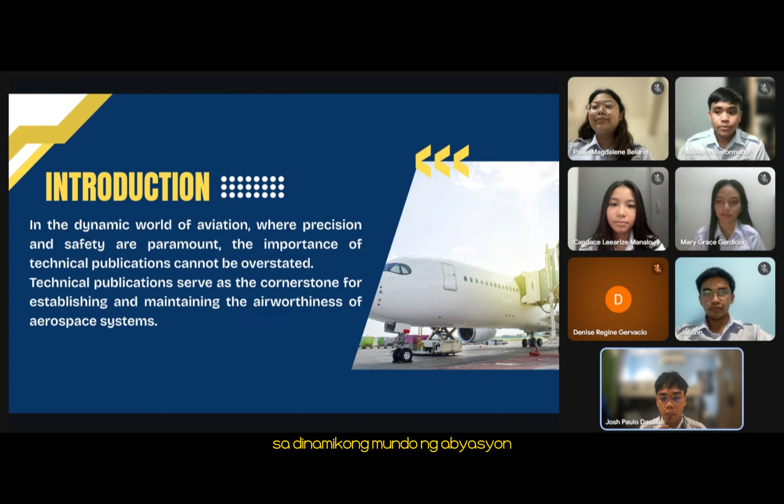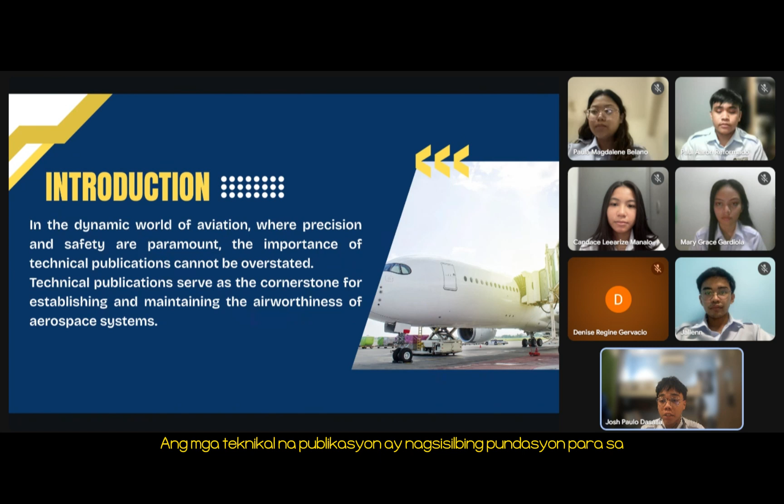In the dynamic world of aviation, where precision and safety are paramount, the importance of technical publications cannot be overstated. Technical publications serve as the cornerstone for establishing and maintaining airworthiness of aerospace systems. The aviation industry operates under a web of stringent regulations to guarantee the safety of air travel. Technical publications act as a compass, guiding industry professionals through the intricate landscape of regulatory requirements.

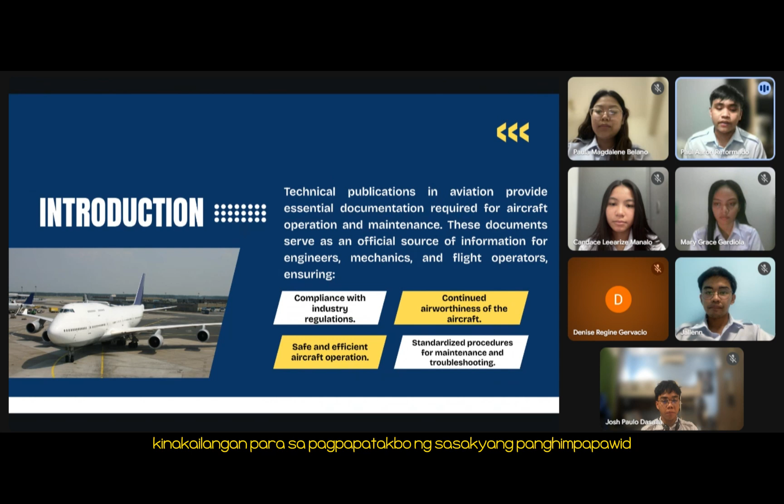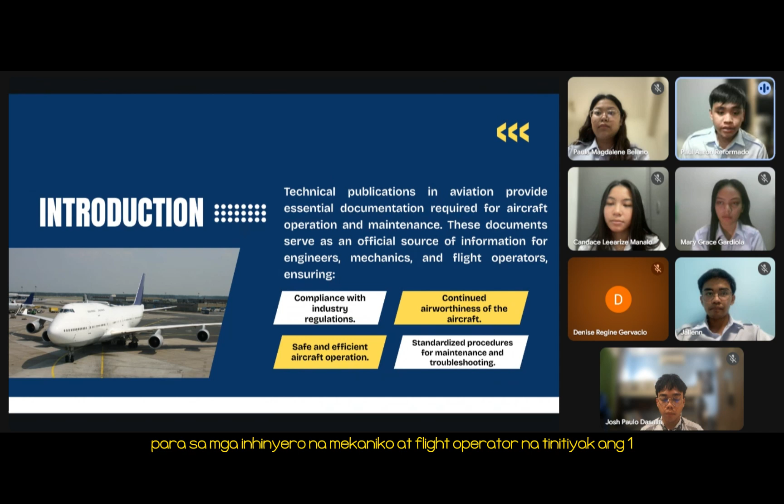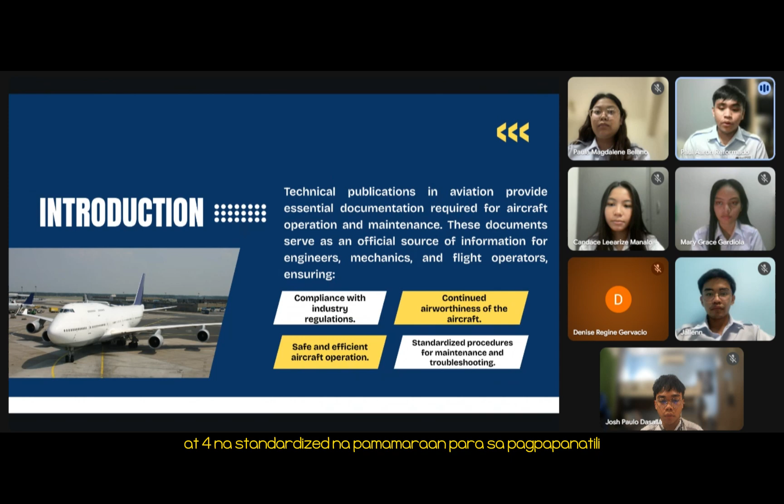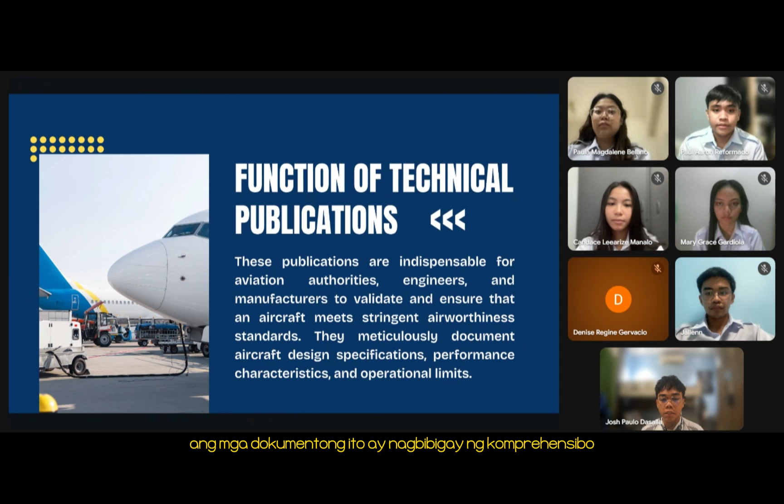Technical publications in aviation provide essential documentation required for aircraft operation and maintenance. These documents serve as an official source of information for engineers, mechanics, and flight operators, ensuring: 1. Compliance with industry regulations, 2. Continued airworthiness of the aircraft, 3. Safe and efficient aircraft operation, and 4. Standardized procedures for maintenance and troubleshooting. These documents provide a comprehensive framework for compliance, covering everything from design and manufacturing standards to operational and maintenance procedures.

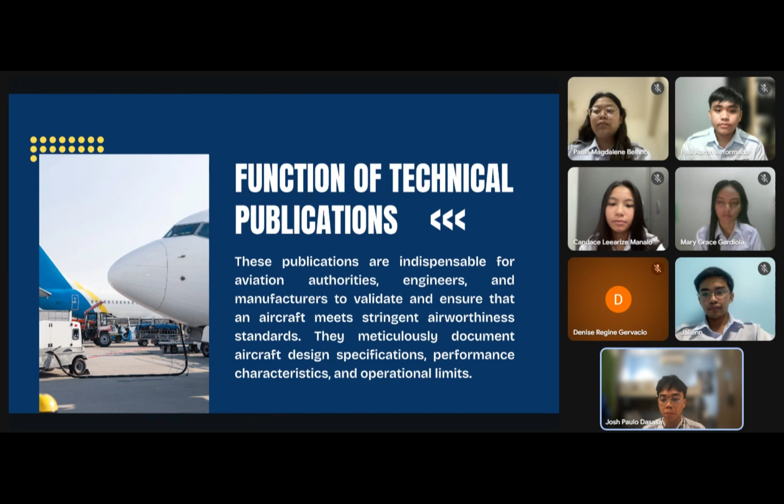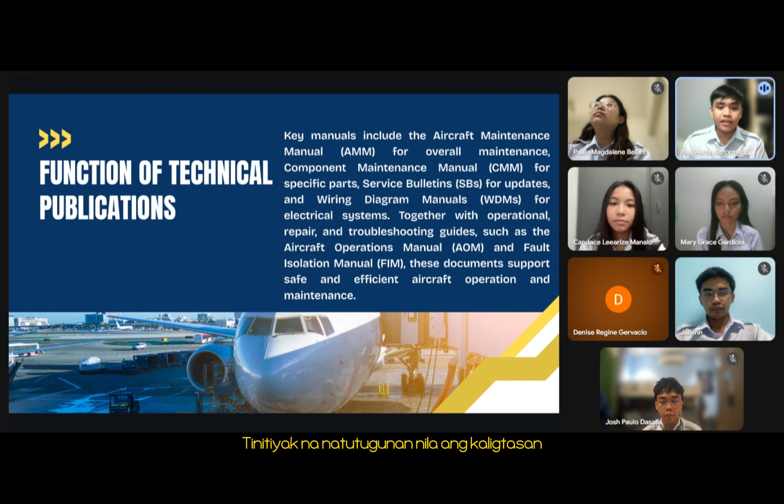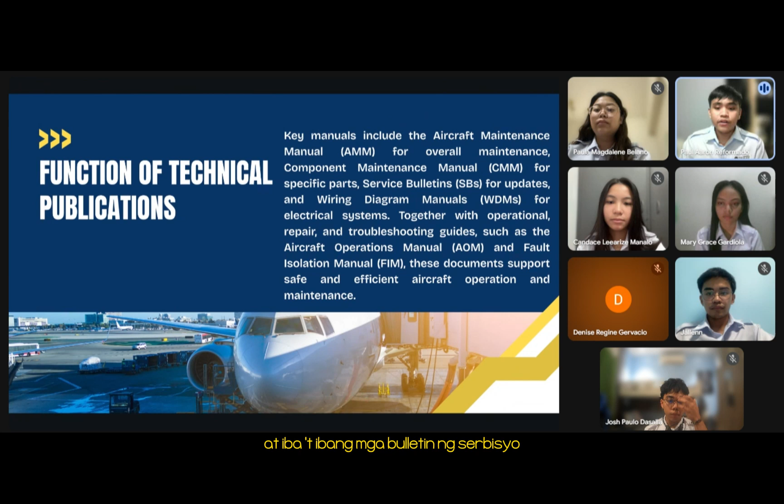Technical publications in aircraft engineering are documents providing essential information for the operation, maintenance, and repair of the aircraft, ensuring they meet the safety and airworthiness standards. Key examples include the Aircraft Maintenance Manual or AMM, Structural Repair Manual or SRM, and various service bulletins and airworthiness directives, which guide mechanics and engineers through tasks. These publications can be digital or paper based and are crucial for regulatory compliance, maintenance planning, and maintaining the aircraft's commercial value.

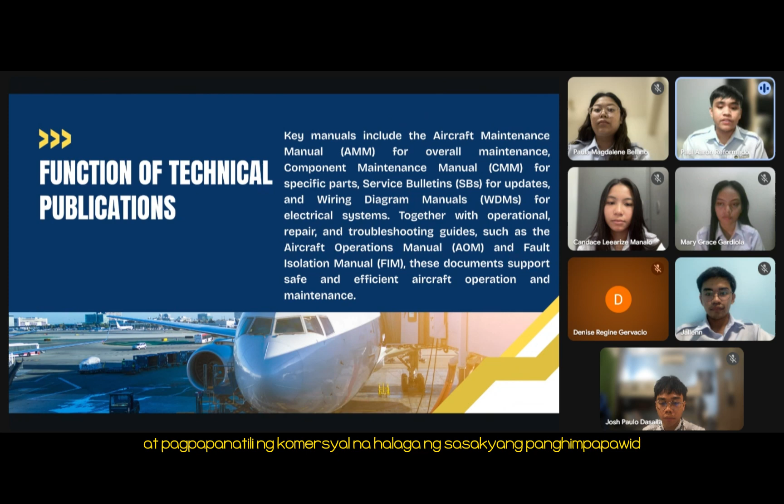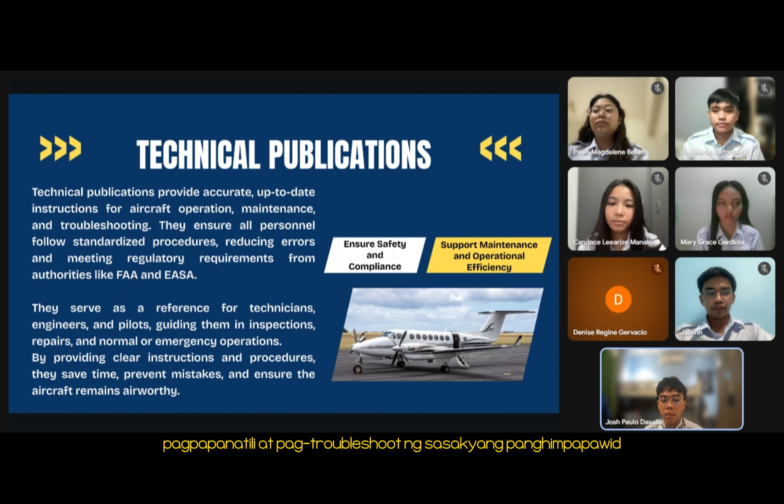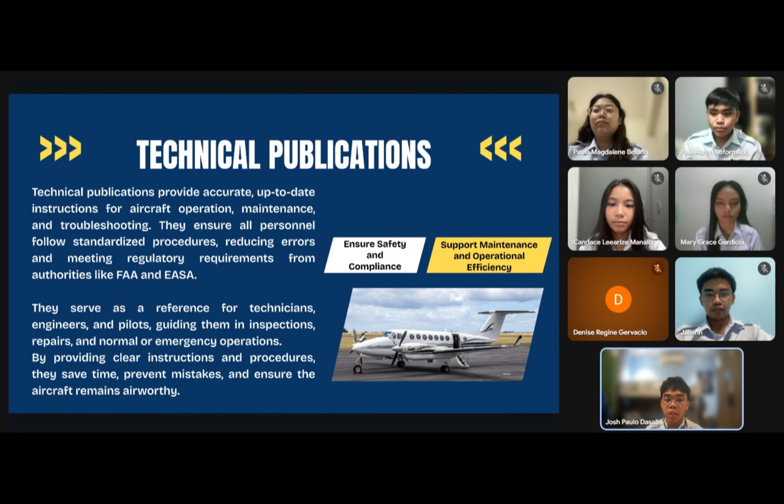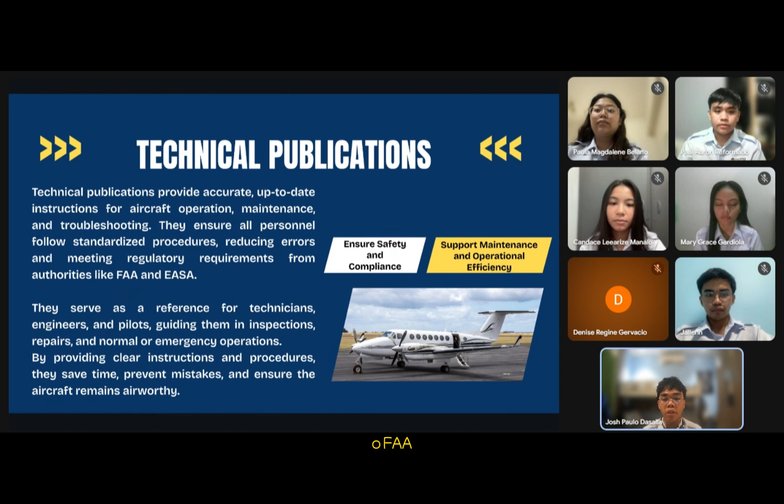Technical publications are critical documents in the aviation industry that provide precise and up to date guidance for the operation, maintenance, and troubleshooting of aircraft. They serve as an authoritative reference for all personnel involved, including pilots, maintenance technicians, and engineers, ensuring that everyone adheres to standardized procedures and protocols. This standardization helps minimize human error, maintain safety, and comply with regulatory requirements set by authorities such as the Federal Aviation Administration or FAA and the European Union Aviation Safety Agency or EASA.

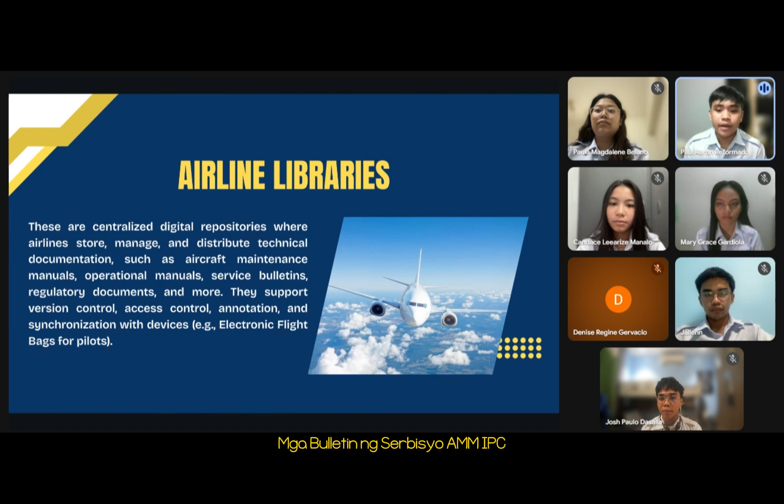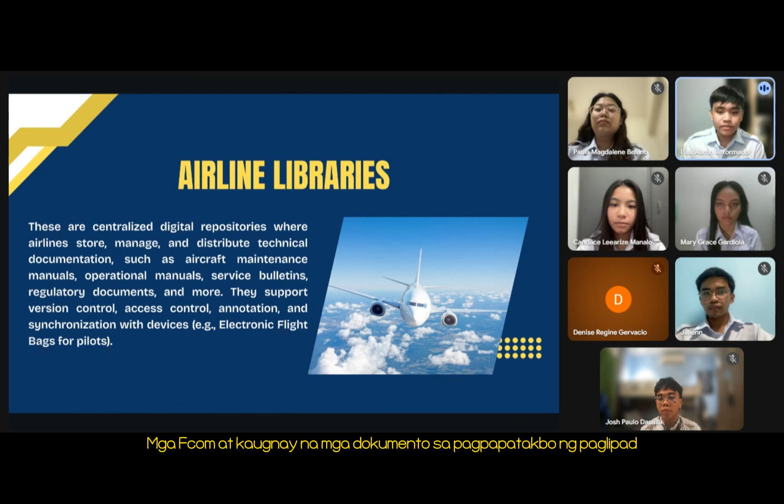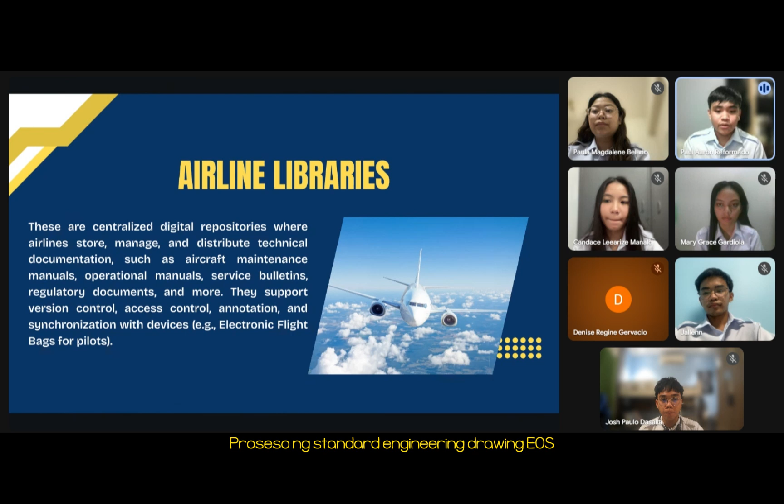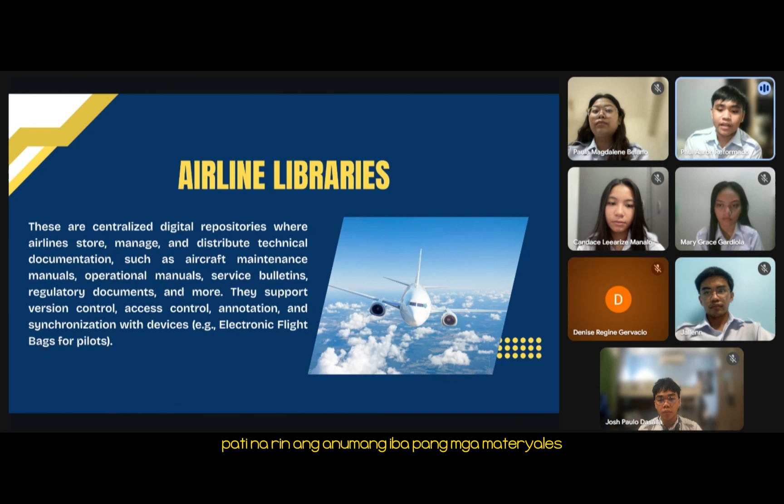To be able to receive and categorize documents, such as but not limited to airworthiness directives, service bulletins, AMM, IPC, SRM, CMM, wiring diagrams, illustrated tools, FCOMs, and related flight operation documents such as bulletins, TRs, OEBs, and equipment lists, flight manuals, weight and balance manuals, product standards, material standards, process standards, engineering drawings, EOs, supplemental manuals, service letters, type certificate data sheets, supplemental type certificates, as well as any other materials specified by the organization.

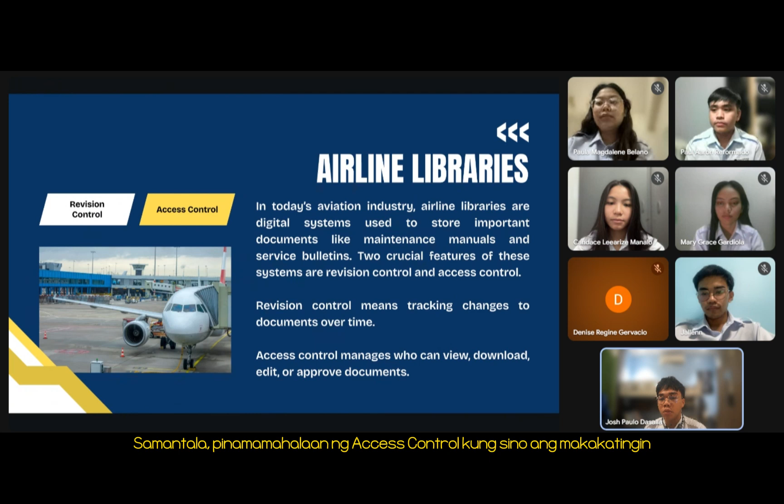In today's aviation industry, airline libraries are digital systems used to store important documents like maintenance manuals and service bulletins. Two crucial features of these systems are revision control and access control. Revision control means tracking changes to documents over time. Meanwhile, access control manages who can view, download, edit, or approve documents.

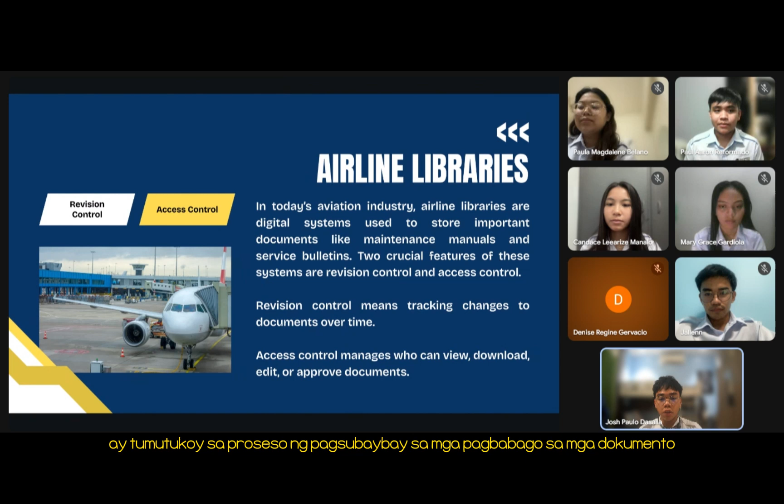Revision control refers to the process of tracking changes to documents over time. Every time a manual or report is updated, the system logs the new versions, including a reference number, date, and sometimes notes on the changes made. Outdated or old versions are flagged or removed so that only the most recent information is used during maintenance and flight operations.

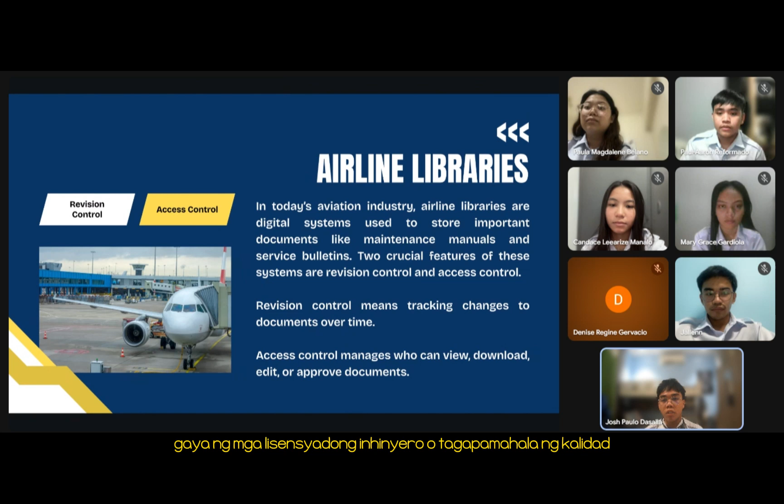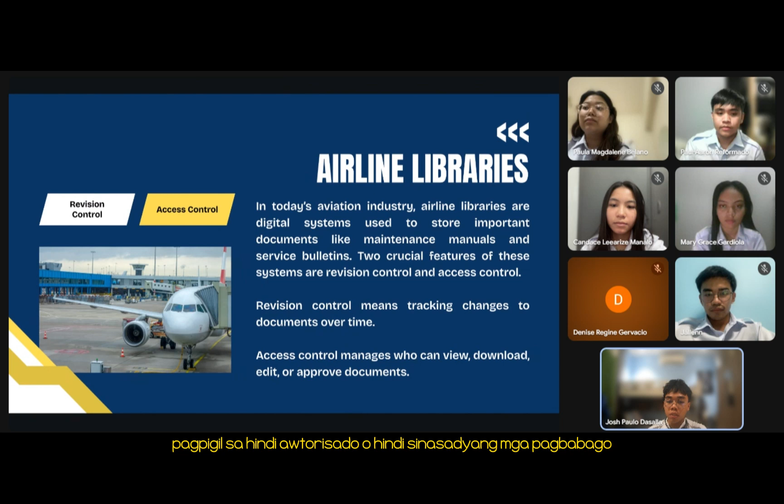Meanwhile, access control manages who can view, download, edit, or approve documents. This ensures that only authorized airline staff, such as licensed engineers or quality managers, can make edits to crucial documents. Others may only have permission to read the documents, preventing unauthorized or accidental changes.

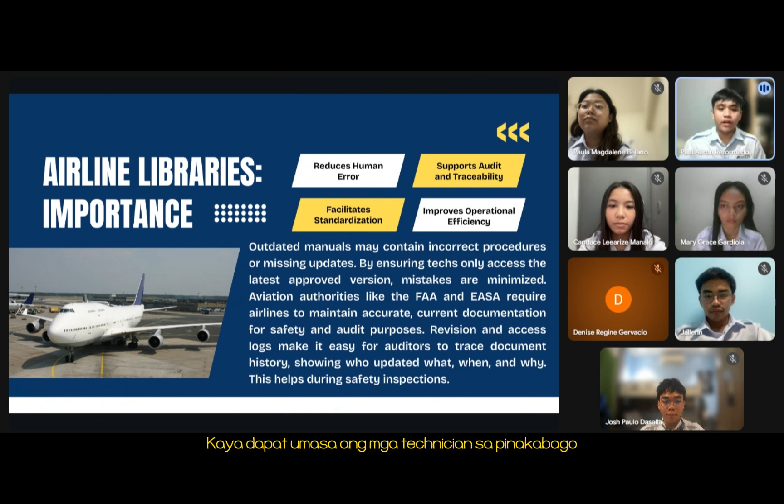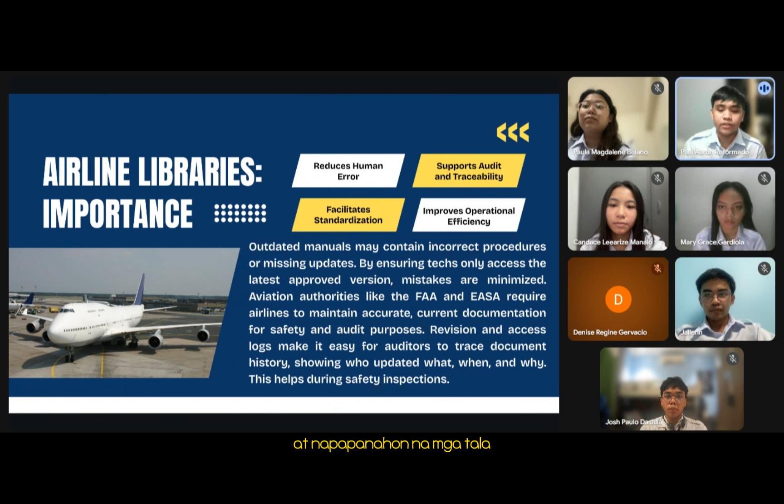Using outdated manuals can lead to errors, so technicians must rely on the most current approved documents. Aviation regulators such as the FAA and EASA mandate that airlines maintain accurate and up-to-date records. Tracking revisions and access allows auditors to monitor changes, supporting safety and regulatory compliance.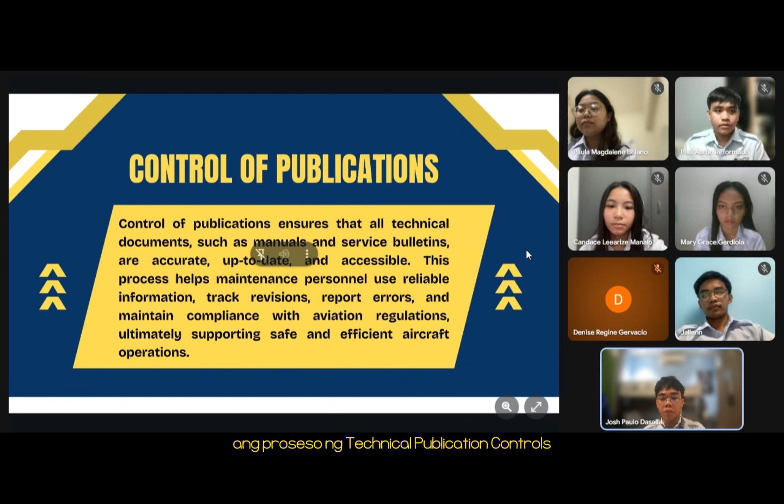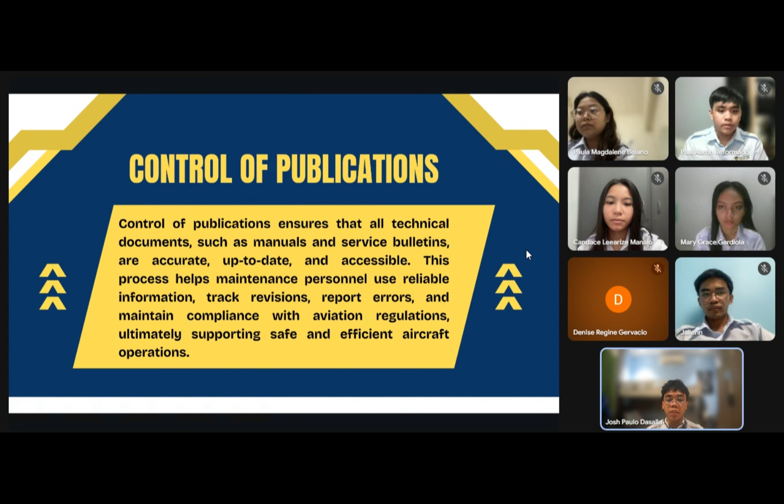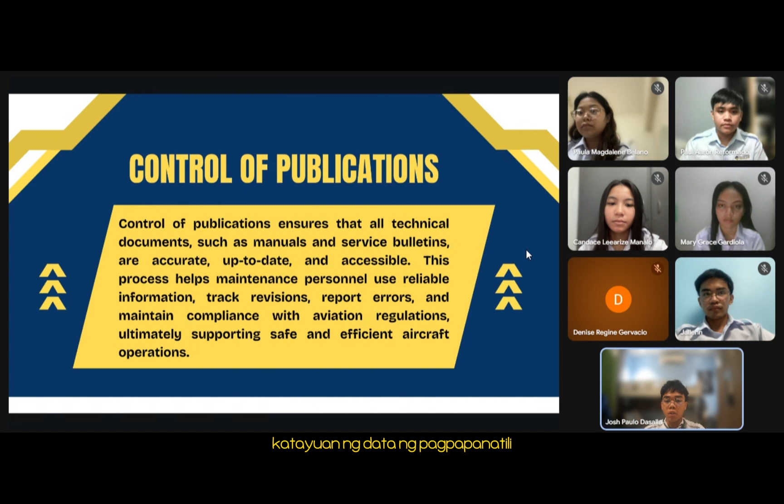The technical publication control process ensures that all relevant maintenance data, such as manuals, bulletins, airworthiness directives, and many more, is current, accurate, and properly managed. Organizations must establish procedures to continuously control the amendment status of maintenance data, verify that updates are received, make data available to maintenance personnel, and remove or archive obsolete versions.

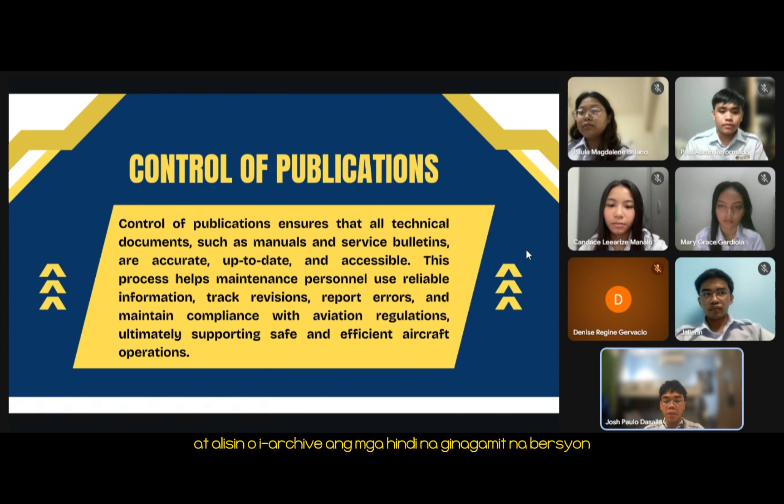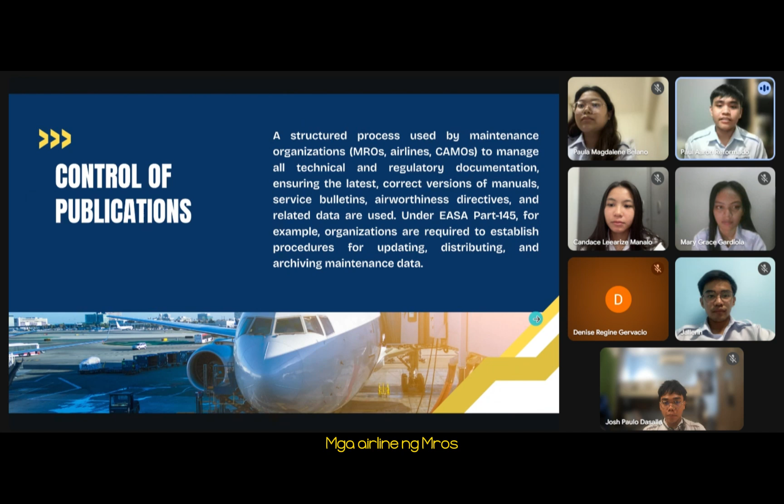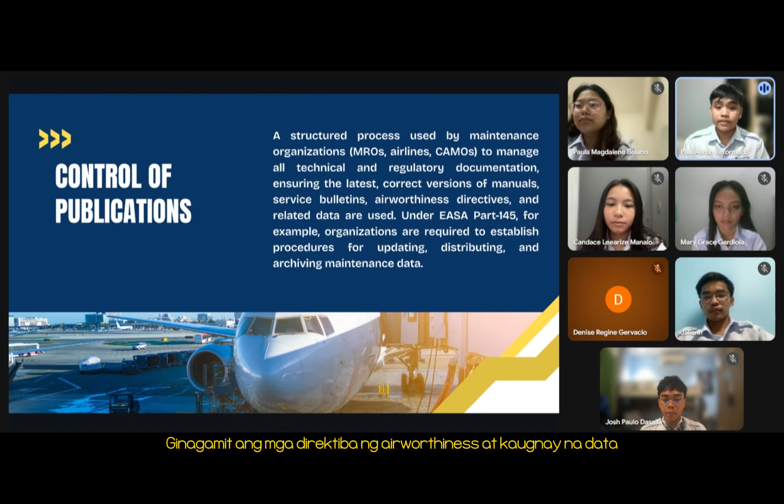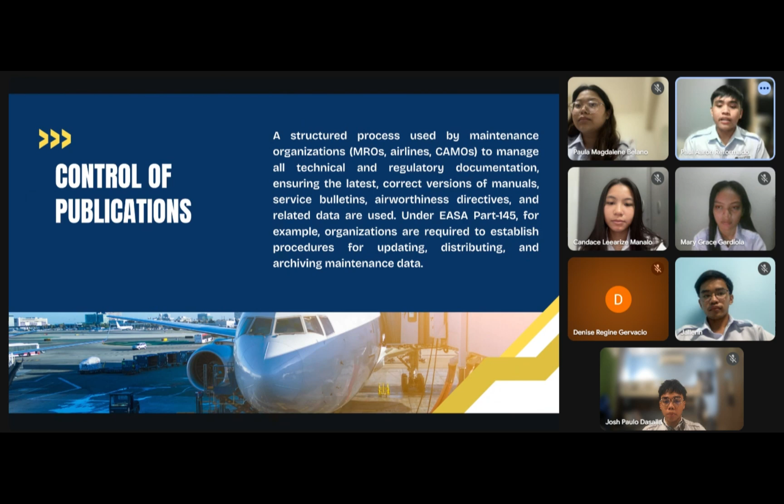A structured process used by maintenance organizations, MROs, airlines, and CAMOs to manage all technical and regulatory documentation, ensuring the latest correct versions of manuals, service bulletins, airworthiness directives, and related data are used. Under EASA Part 145, for example, organizations are required to establish procedures for updating, distributing, and archiving maintenance data.

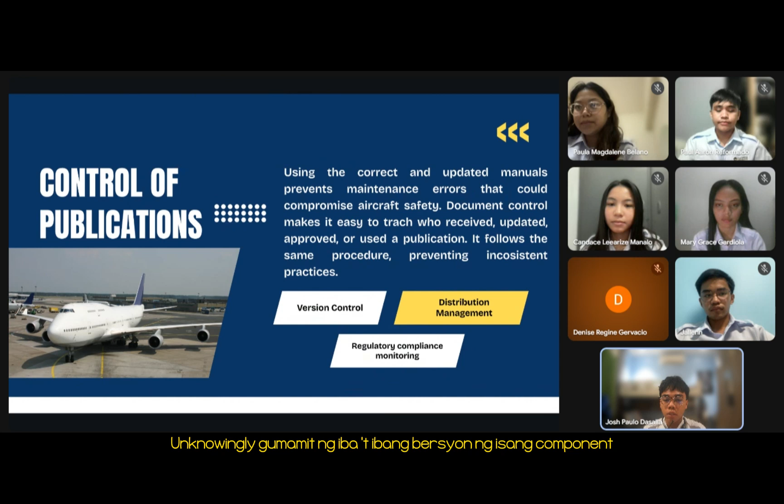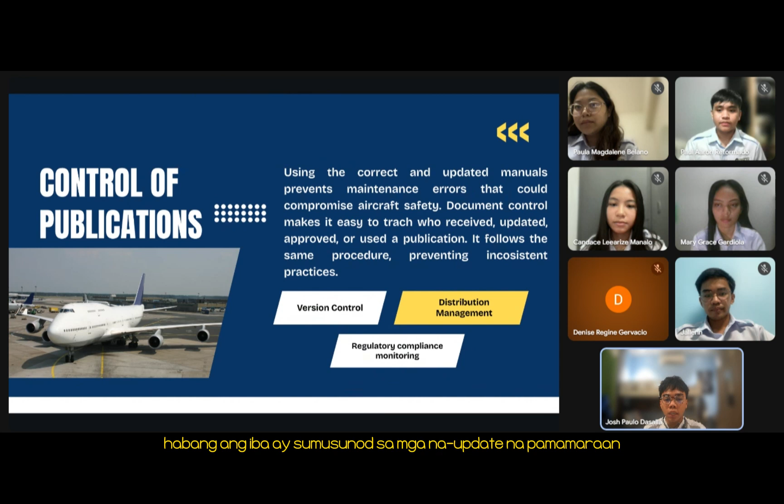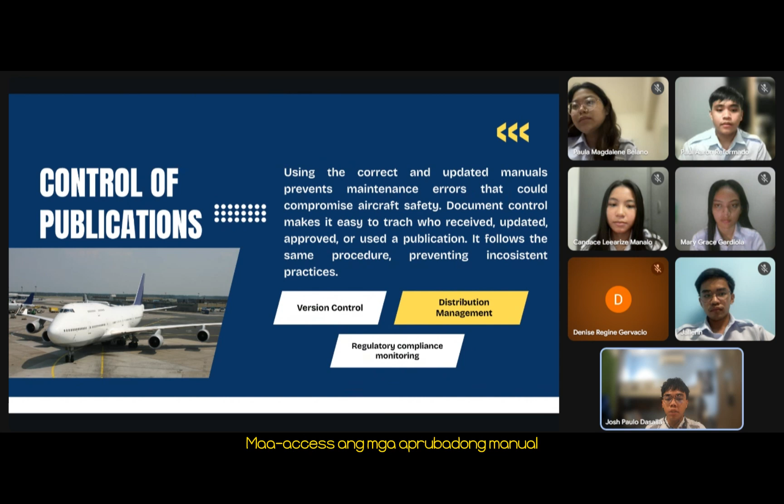For example, without proper control of publications, two technicians might unknowingly use different versions of a component maintenance manual, or CMM, to repair the same aircraft part. One may use outdated torque values, while the other follows updated procedures. By enforcing strict control over the publication process, ensuring only the latest approved manuals are accessible, maintenance teams prevent inconsistent repairs and avoid potential safety risks, thereby ensuring all work aligns with current standards and regulations.

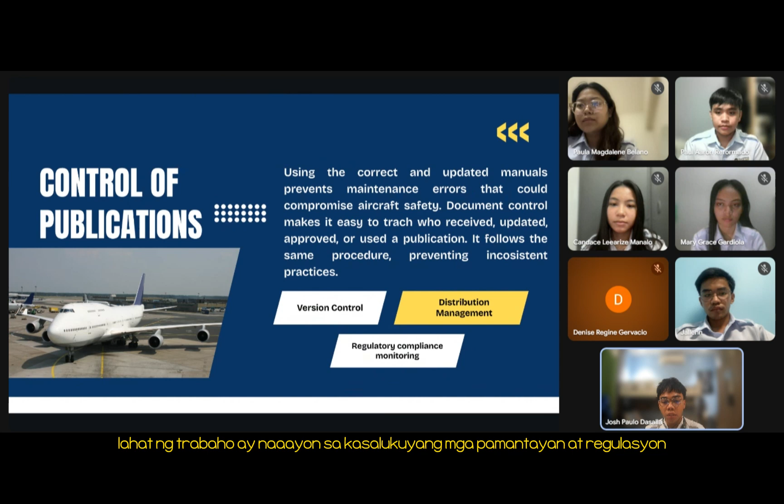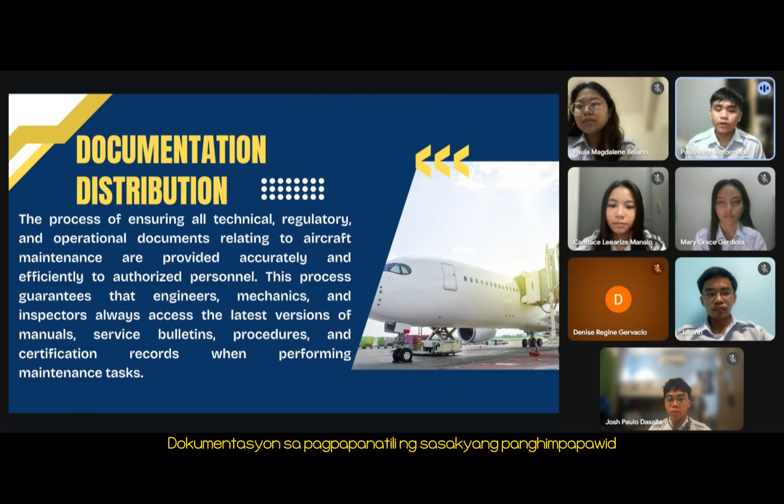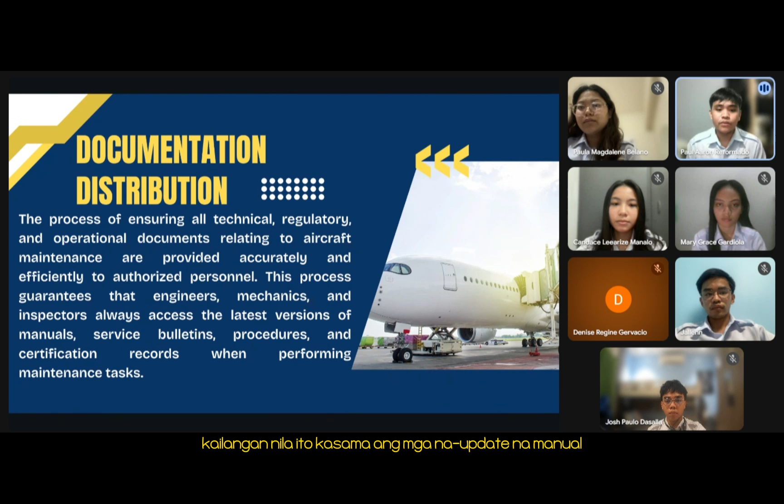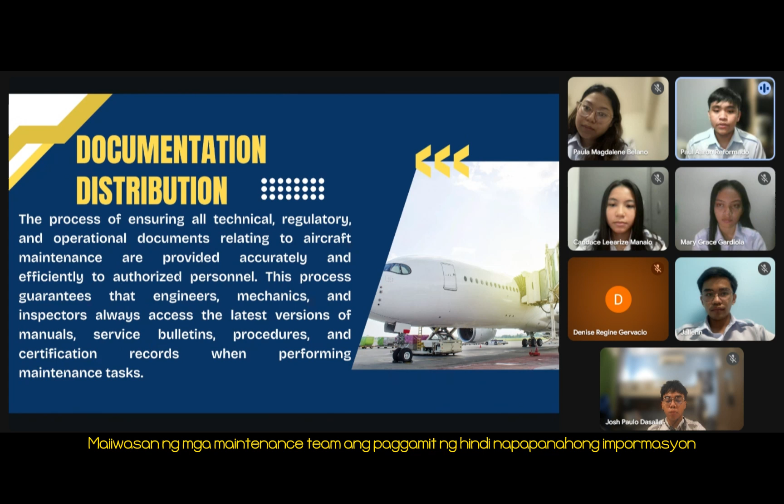Aircraft maintenance documentation distribution ensures that mechanics, engineers, and inspectors always have the latest technical and regulatory documents they need. This includes updated manuals, service bulletins, and certification records. By controlling how these documents are distributed and accessed, maintenance teams can avoid using outdated information, thereby helping to protect aircraft safety and ensure compliance with aviation regulations.

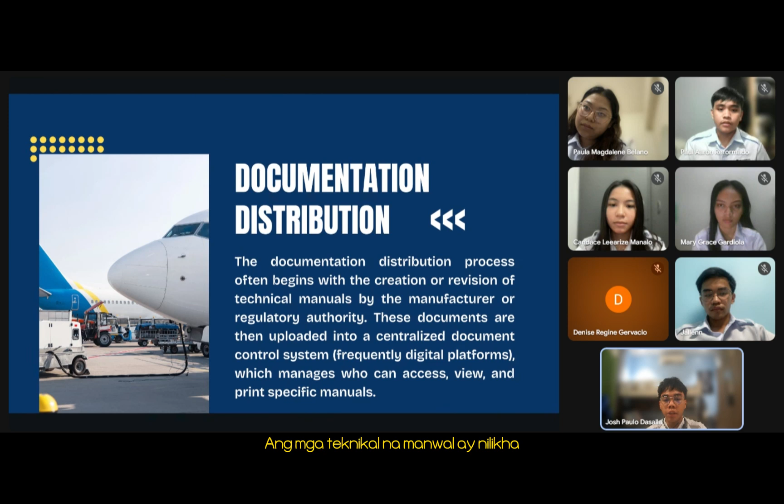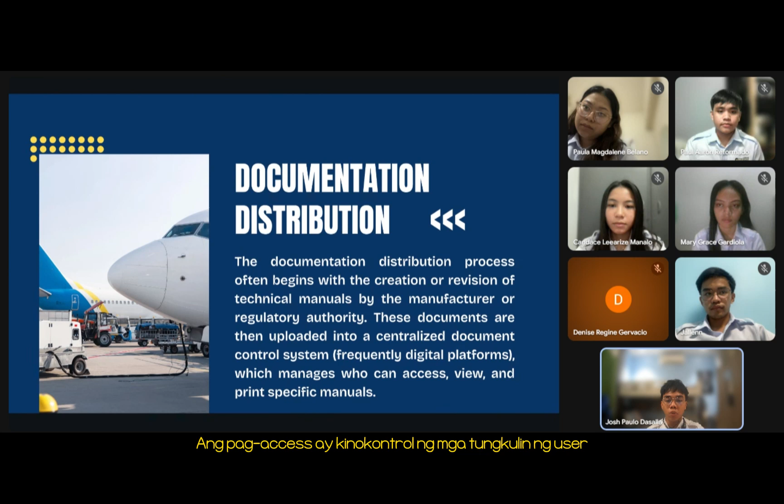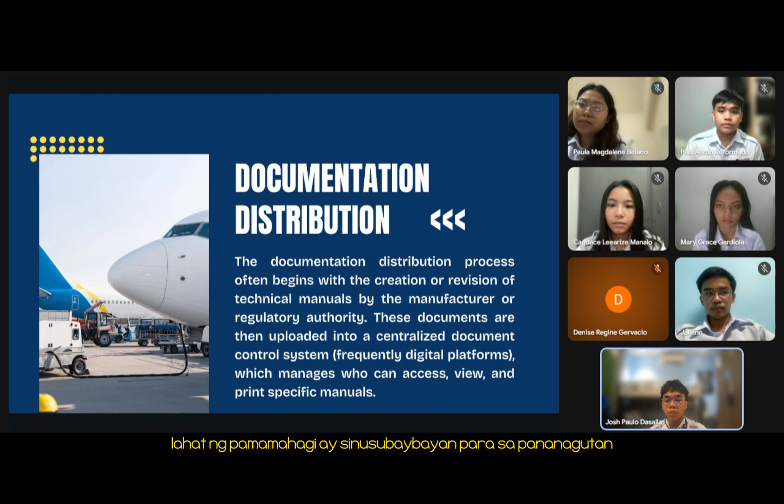Technical manuals are created or updated by manufacturers or regulators, then uploaded into a central digital platform. Access is controlled by user roles, and automated alerts notify staff of updates. All distribution is tracked for accountability, ensuring only qualified personnel use the correct current documents.

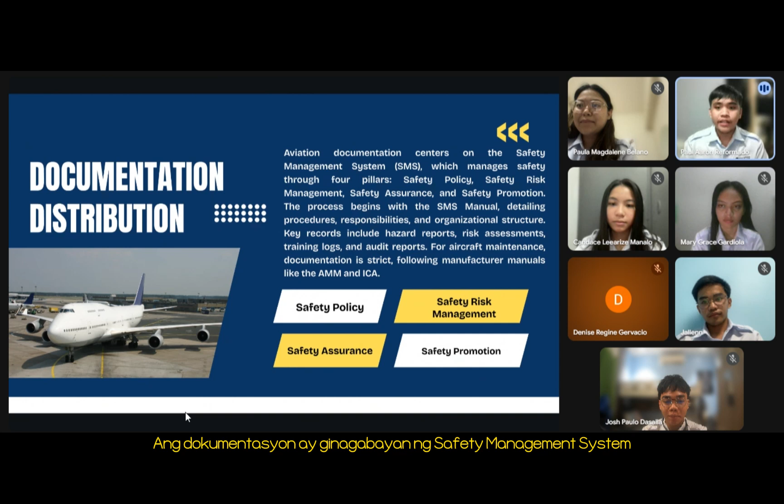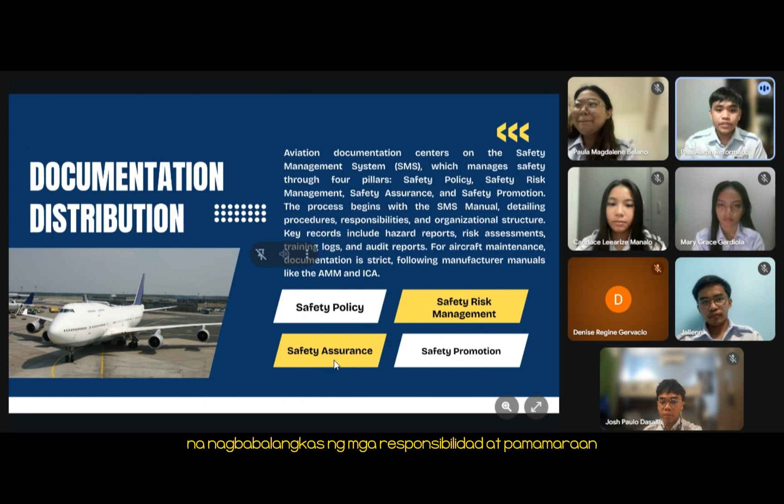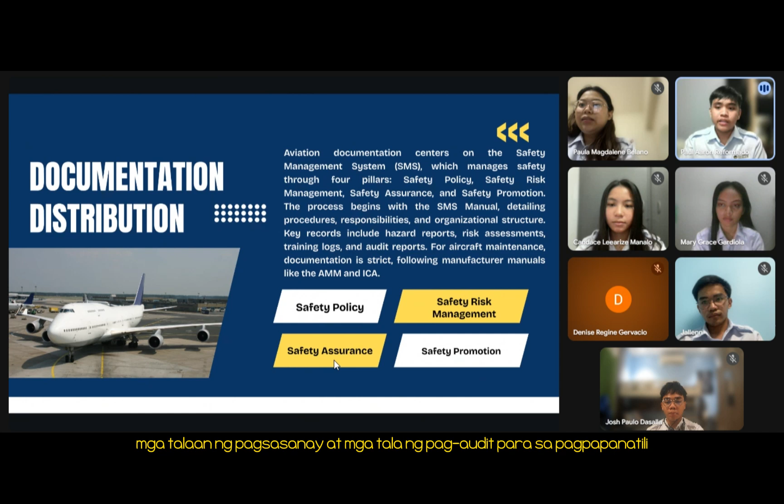Documentation is guided by the Safety Management System, which has four pillars: safety policy, risk management, assurance, and promotion. It begins with the SMS manual, which outlines responsibilities and procedures. Key documents include hazard reports, risk assessments, training records, and audit logs. For maintenance, strict adherence to manuals like the Aircraft Maintenance Manual and instructions for continued airworthiness ensures safety and compliance.

We hope this presentation gave you a clearer understanding of the essential topics related to aviation publications. Once again, thank you for your time and attention.

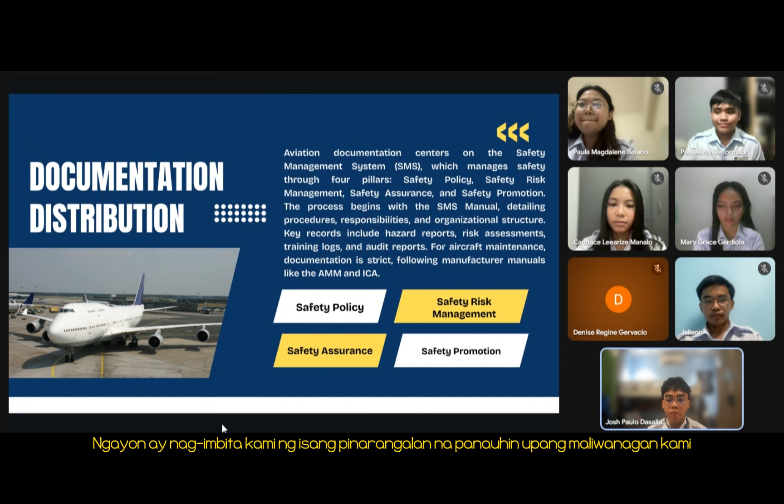Today, we have invited an honored guest to enlighten us with his knowledge and tackle more in line with the topics that we have discussed. Today, we are honored to have with us a very special guest, a licensed aircraft mechanic currently working in Abu Dhabi. We truly appreciate his time and willingness to share his experience in the aviation field. So, without further ado, let us begin.

Good evening, sir. Good evening, everyone. So, first off, what is your name, po? What company are you currently working in, and what is your current position? Okay, so I'm Stephen Matthew Belano. Right now, I'm working for Sanad Aerotech. Sanad Aerotech is an engine MRO, mainly focusing on aircraft engines. I'm working as a principal technician or a supervisor for the engine maintenance overhaul department of the company. All right, thank you, sir.

So for our topic, sir, we have technical publications. What can you say about this, sir? Maybe you can share some insights. For documentation, generally, it is a process of gathering all maintenance repair plans, all repairs, all alterations, and all maintenance programs, which are mandated to be stored in such a way that they can never be altered, cannot be damaged, and cannot be taken by anyone. Thank you so much, sir, for that additional information.